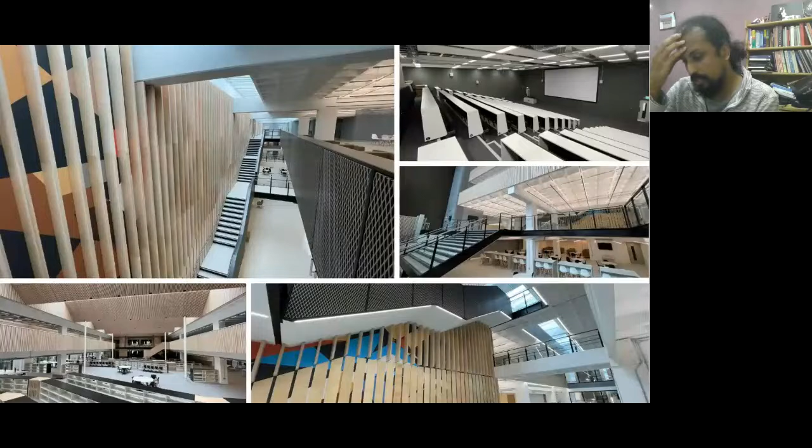We have had actually a lot of investment in our infrastructure and our campus in the last few years. I've been here for about 6 years now, and since I've started, there's been a lot of change. It's a pretty exciting time actually to be at South Bank.

The Southwark campus, which is in Southwark and on the South Bank, has had a number of new buildings. The most recent is the refurbishment of the hub, which is this building here you can see in these pictures. This was opened this academic year. It's a brilliant space, and has also recently been nominated for an architectural award for green refurbishment.

So it's been rebuilt from the old 1960s structure using sustainable techniques and sustainable materials. And that's something that we'll talk about in a bit as well, which is very much focused in our civil engineering as well.

So in total, we have about 15,000 students from 130 countries approximately, across 7 schools. And in the built environment architecture, we have about 2,500 students. That includes undergraduate and postgraduate.

It's not just about teaching for us, it's also about research and enterprise. And we've got a rich history and performance in research. Our recent Research Excellence Framework, which is the government's national assessment every 8 years, tests all the universities in the country on the quality and impact of their research outputs. We did very well, in particular in civil engineering and built environment.

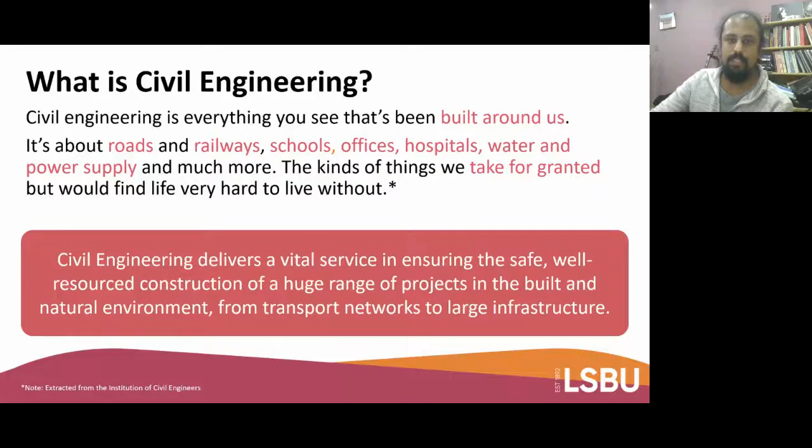Civil engineering, as the Institution of Civil Engineers would describe it, is everything that you see around us. It's the built environment. It's the roads, the rail, our buildings, our water supply, our power supply, everything that we take for granted, and we would find life very difficult if we didn't have them, if they weren't working and weren't maintained. So civil engineering really is vital.

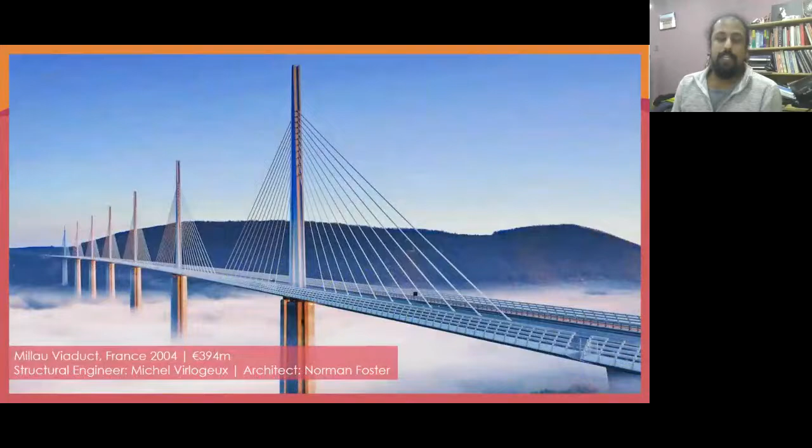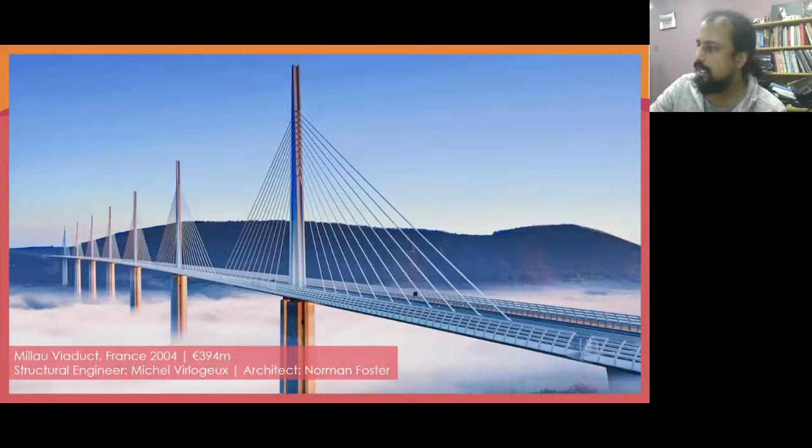I recently went to the airport in Doha, in Qatar, which is an incredible building as well.

There is also very interesting architecture in London itself, and we're very lucky to be situated in London because we can go on a lot of site visits and have relationships with London construction companies and civil engineering companies.

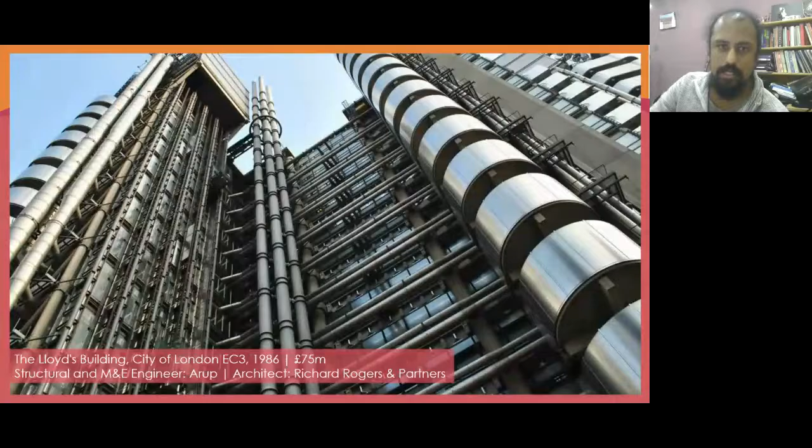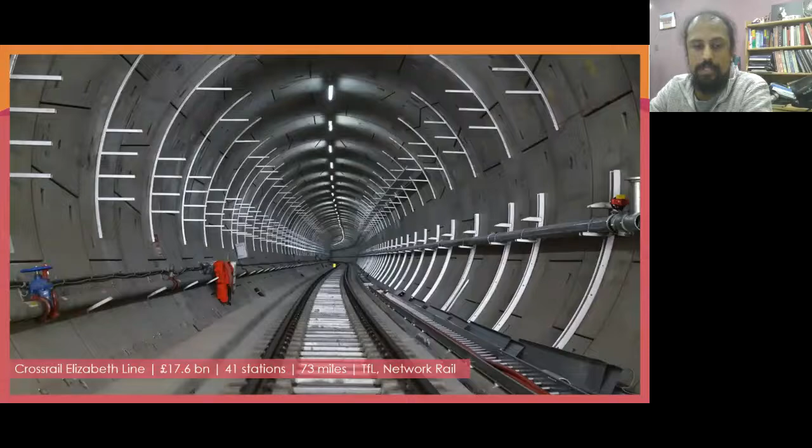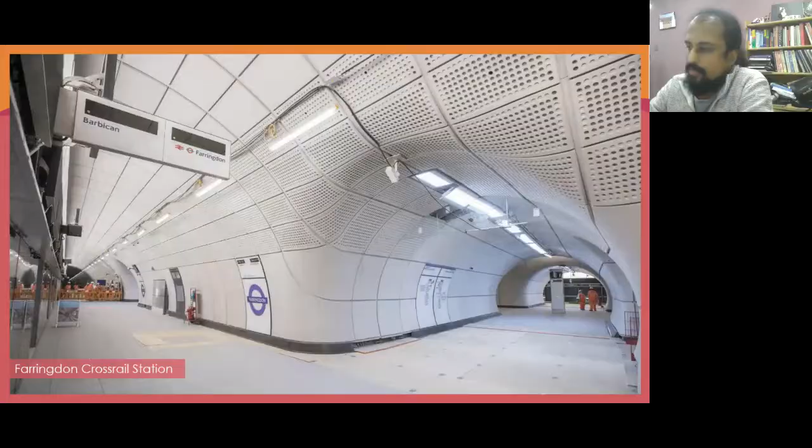So what kind of construction projects are happening now in London? These are some of the things our apprenticeship students work on, and also our full-time students will be involved with when they graduate. Crossrail has finished, so the now known as the Elizabeth line is effectively complete. It was somewhat delayed, and it was a good 4 billion over budget, so it was not a perfect delivery. There's a lot of lessons that can be learned in the procurement and execution of that. But as a civil engineering project, the actual engineering behind it is extremely impressive and exciting.

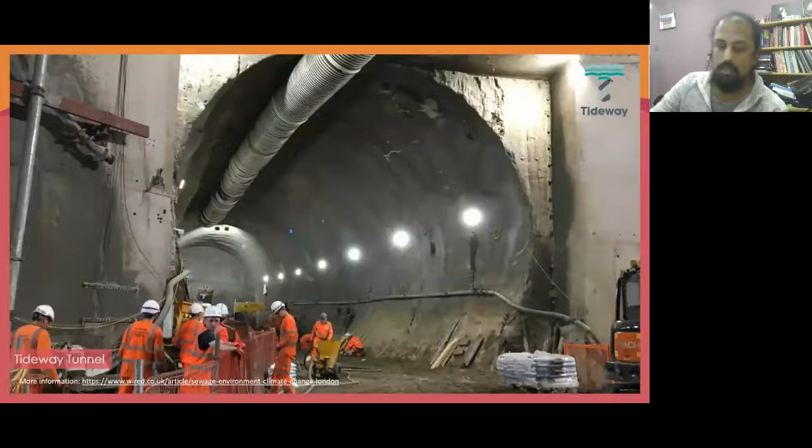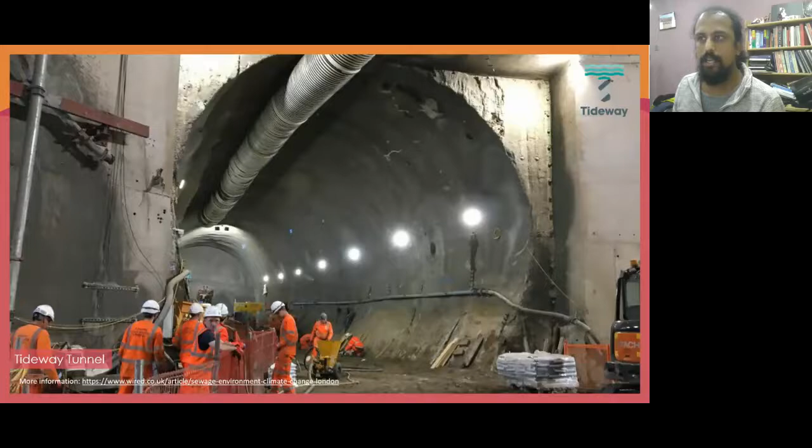We currently have the Tideway Tunnel, which is basically the new sewer system for London, which is going to hopefully solve the sewerage problem that has been a problem in London since Victorian times, because much of our sewage system is Victorian. That's a testament to the engineering skills of the Victorians, that they're still in use, but it's not really fit for purpose in the modern size of London. So the Tideway Tunnel is a very exciting and complex engineering project.

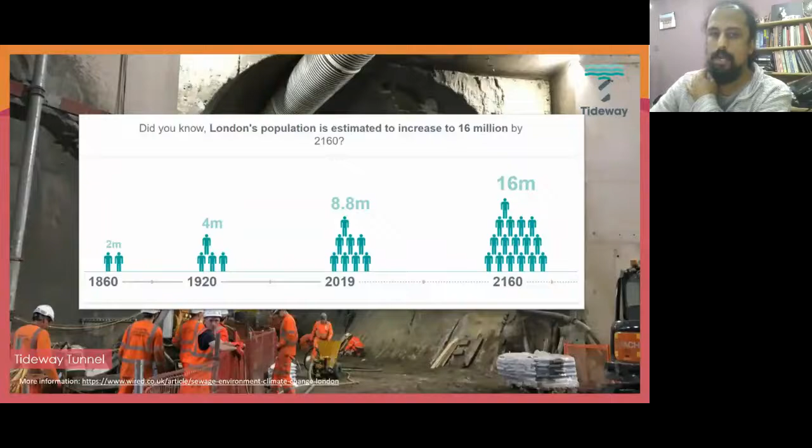Again, a bit like Crossrail, like the Elizabeth line, London is basically a honeycomb underneath the surface of tube lines and pipes and service lines, and in a lot of cases the engineers will come across tube lines and abandoned infrastructure which is not on any kind of map or schematic. So it's a very interesting and very complex thing to dig a tunnel through London.

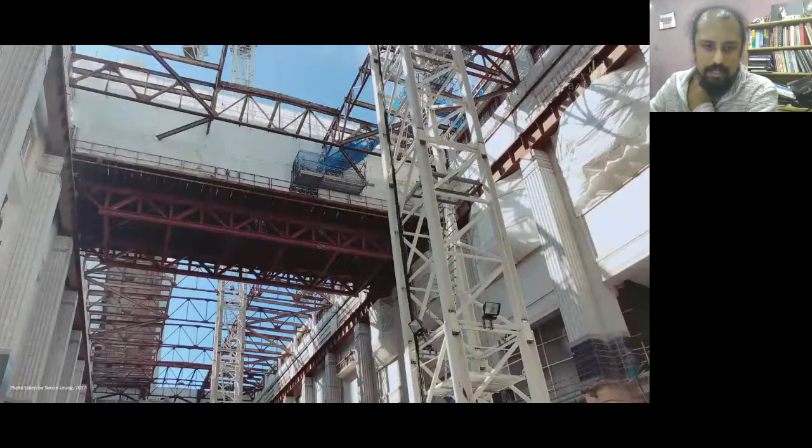Another interesting project at the moment is the development of Battersea Power Station. This is a photo taken by one of our colleagues, Simon Leung, who's an associate professor in structural engineering. That's the inside as it's been built and constructed.

One of the structures, the Keyworth building, has what used to be the largest wooden structure in the city. It's very impressive. The flagship structure at the moment is the Hub, which used to be the London Road building. As I mentioned earlier, this has been shortlisted for an award for green architecture, because the whole structure was refurbished using sustainable techniques and sustainable materials, rather than knocking it down and using lots of new concrete and new steel. And concrete is one of the biggest outputters of CO2.

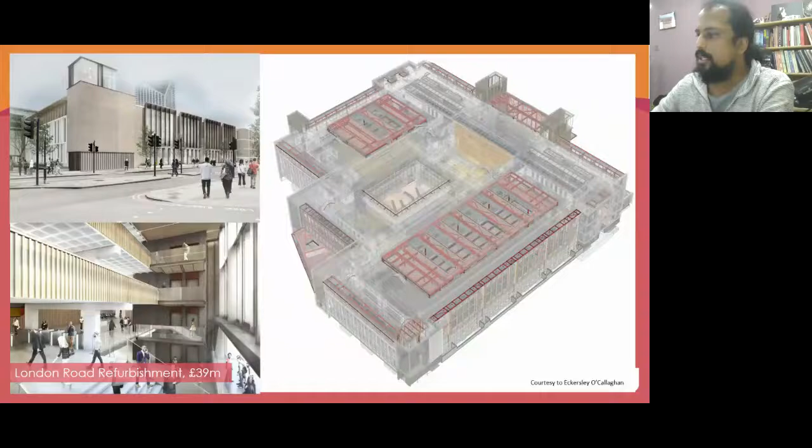As concrete sets, it gives off a lot of carbon dioxide. So modern structural design and engineering is very focused on trying to reduce the climate impact and emission impact of structures. That means using less concrete, using new types of concrete, some of which is being developed here by colleagues and academics using different types of concrete with recycled materials like recycled glass fibers and other carbon composites, as well as trying to use less steel in this building, reusing the steel. So the actual building structure is the same as it was before, but the inside of the building is completely different and completely refurbished.

And it's great because the old building was not particularly pleasant, but this one is an incredible space to work in.

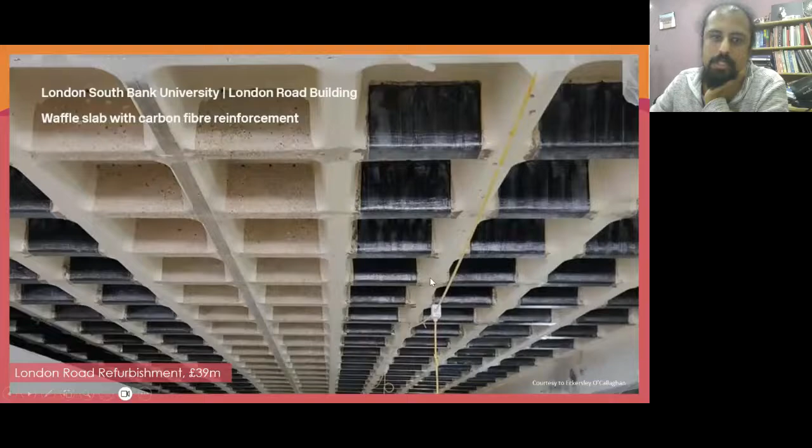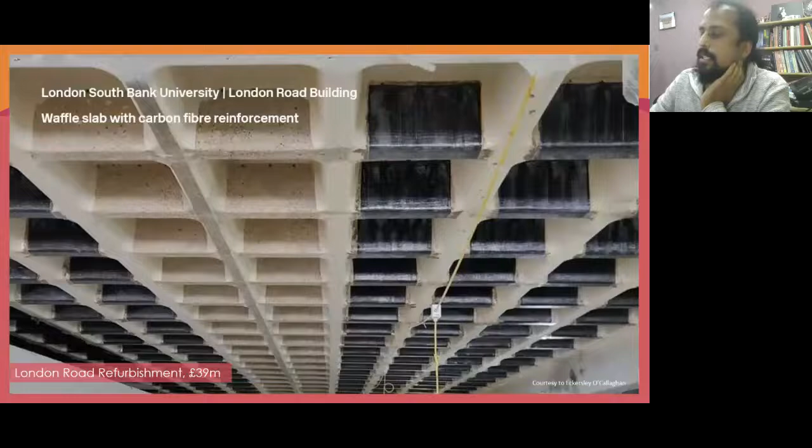One of the interesting things that's been done is the old waffle slab flooring, which is a set concrete pour put into the structure, needed to be reinforced to increase the load bearing. This was done using carbon fiber, by wrapping carbon fiber tape along the slab. So it's some very clever and novel civil engineering, and really that's what civil engineering is about: finding a problem and solving it. This has resulted in an incredible building, which has been shortlisted for an award.

So civil engineering is not just about designing structures and the built environment, it's also about protecting that environment and dealing with natural hazards. My particular area of research is coastal hazards. I'm a coastal engineer, which is a branch of civil engineering, and I particularly focus on tsunami.

Tsunami obviously isn't necessarily an urgent hazard for the UK, but this is representative of the breadth of research we do and how it applies.

Tsunamis are also similar to hazards pertinent to the UK, such as storm surges and sea level rise. Around the UK, we have significant billions of pounds worth of coastal infrastructure protected by seawalls, which will need to be retrofitted because sea levels are rising and storms are getting more severe. So there's a huge need and space for additional coastal engineering within civil engineering.

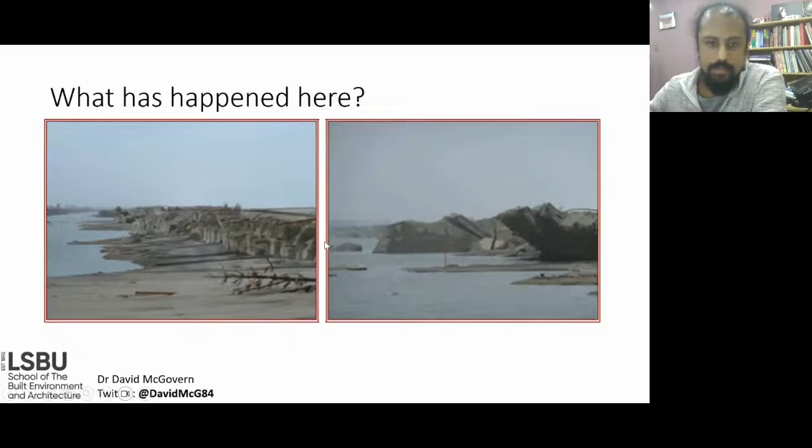This picture shows the aftermath of two defensive structures on the Japanese coast, destroyed by the 2011 tsunami. My research is based on making physical models, small-scale models of tsunamis interacting with the coastline. We do this because a tsunami is a rare and very destructive event, so it's very difficult to understand and get data on how it has damaged a structure. If we know how a tsunami has damaged a structure, we can design it to be more resilient, which is the role of the civil engineer.

But we can't do that just by looking at what happens in the real world. We need to be able to control and do experiments. We can measure the forces, draw graphs, and find equations which predict these forces. So I and my colleagues have done lots of work in large facilities where we generate small-scale tsunamis and look at the impact on structures.

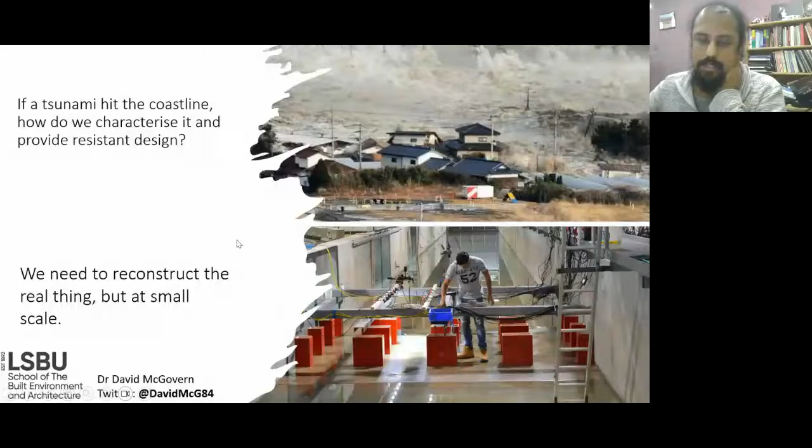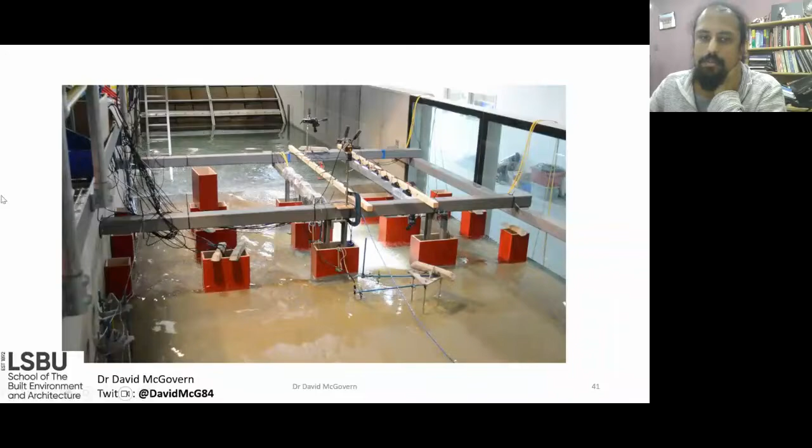This is an example of our videos, showing our experiments looking at tsunamis interacting with models of coastal structures, where we measure the forces and velocities of the flow.

This in particular is a video of a tsunami passing a model coastal structure. Here we're looking at the sediment transport that occurs, in particular a process called scour, which is the development of a large hole around the foundations of the structure because of the flooding wave. If you expose the foundations of a structure, it will lead to failure. So it's a very important aspect.

In fact, scour is one of the major causes of bridge failure worldwide and remains a very significant hazard to any hydraulic structure. That's my area of expertise.

The whole point here is that civil engineering is not just the design and construction at full scale, it's also the modeling, whether computational or laboratory physical modeling, of what your design will be and whether it will work. Because you don't want to test it out in the real thing.

You want to make sure it's going to work before you build it, because of the money, but also because if it's a structure protecting the coastline, for example, getting it wrong can cause significant losses, both economic and in human life.

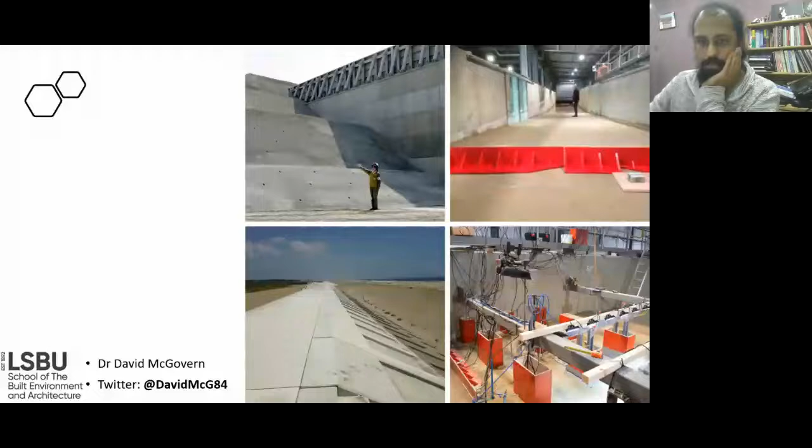So that's what civil engineering is, and there's more to it than that, of course, but that's kind of the two sides of it. So what do we offer here at South Bank if you came and chose to study with us?

Within our school, within the built environment and architecture, we've got three divisions: the division of architecture, which is the design of structures, construction, property, and surveying, which includes things like quantity surveying, which is all to do with procurement of materials and making sure projects are on time and on budget, building surveying, etc.

And then what we're focused on here today, which is civil engineering, which is also paired with building services engineering. Building services is things like water, electrics, stuff like that. So, because this is a civil engineering talk, I will talk about that.

What we do learn if you did a Bachelor of Engineering in Civil Engineering here at Southbank, we would do a number of core topics. We would give you the fundamentals in order to come out being able to come up with innovative solutions to problems within the built environment, which is what engineering is about. It's about taking a tool and knowledge and applying it to a scenario that you're not necessarily familiar with.

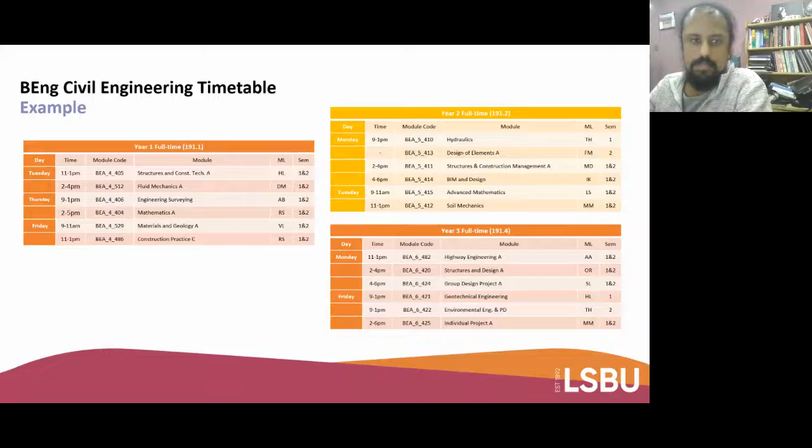And then once you've got through the first year, we would start studying more in-depth modules and more specialist topics such as hydraulics, advanced mathematics, and soil mechanics. In your final year, you do an individual project, which is a very important part of the degree. I'll come to that in a minute.

We use a lot of modern software, so you as a student would be able to use, and would be taught by people who are expert in, these different types of software. For me in particular, it's MATLAB, which is a high-level programming language, so you can use it for everything really—data analysis, big data. We teach that to give you the tools for modern engineering, which is very much data-based as well. There's lots of other software that we use and teach you to use.

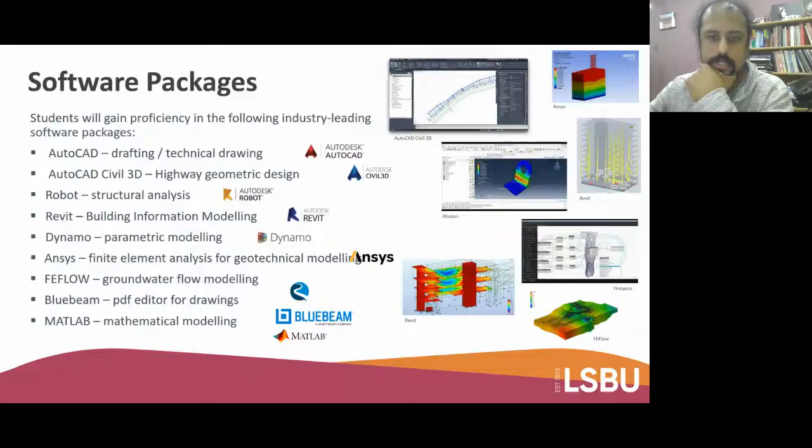So I think that's just a bit of extra information. There are entry requirements. In terms of A-levels, let's start with the courses first. We have a number of different courses within civil engineering. There's the HNC, which is a higher national certificate, and that's what we call a level 4 qualification.

Now, if you have A-levels or similar qualifications, such as at school, we call that a level 3 qualification. Your GCSE level is level 2. So you would come into university often with a level 3 qualification. A level 4, the HNC, is a part-time qualification. It's often very popular with those working in civil engineering, who will have day release to come and study an HNC. They may not have the academic background to go straight into the apprenticeship program, for example.

But you could study the HNC for 2 years and then later come back and continue to the BEng, which a lot of our students in the HNC do. So that's the level 4 qualification.

Then you have the BEng, the Bachelor of Engineering Honours degree, which is the full-time version. The requirements for that are BBC at A level, so about 112 UCAS points—all of this is on the website—or equivalent BTEC would be DDM. And that is to do the full-time civil engineering honours degree, so you would come out as a Bachelor of Engineering.

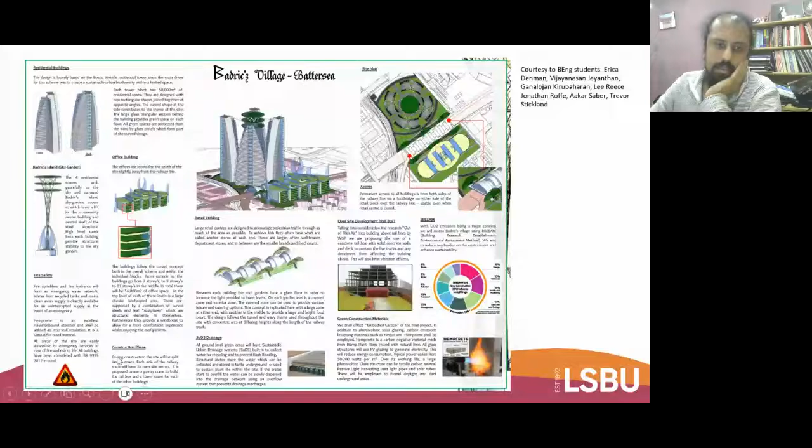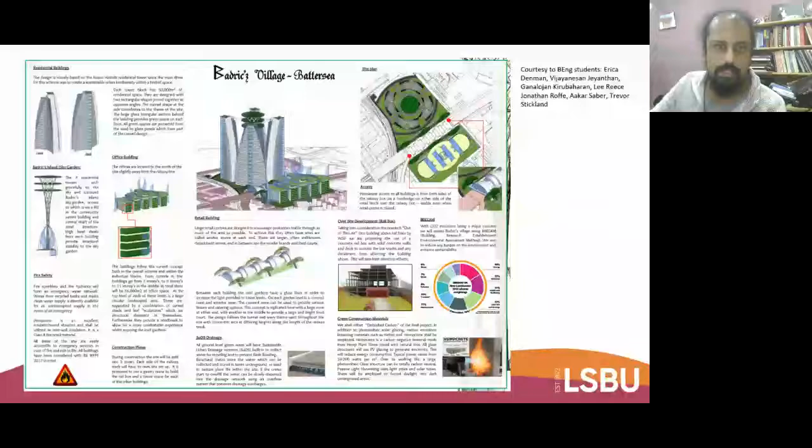It doesn't just involve the structural side of things. It involves all sorts of other aspects which need to be put into the design process and presentation, and that includes the drainage, the construction phases, safety, and the emissions and the sustainability. So all of that is very important and very much designed to be as it would be if you were doing this as a future employed engineer.

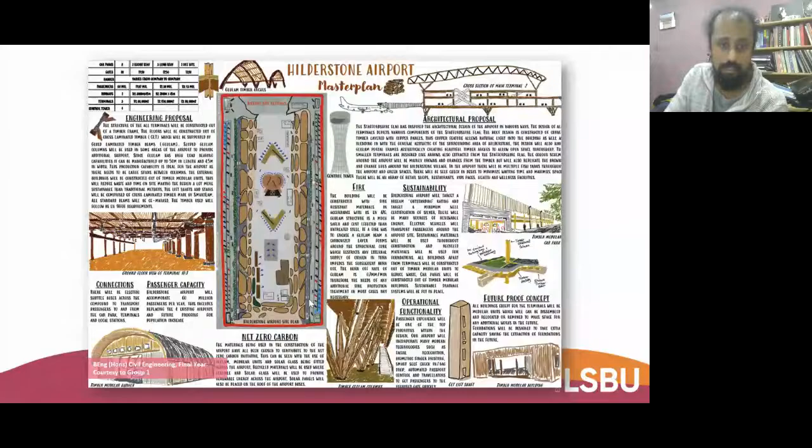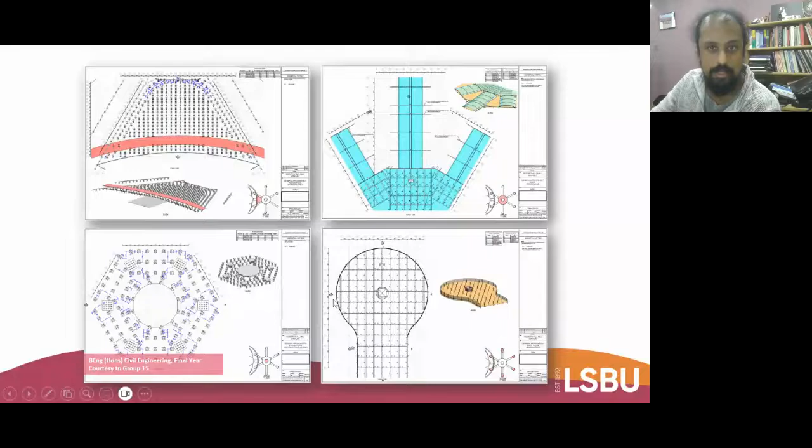There's another one here, which was an airport. Again, these are the sort of flyers for this, the posters for it, which are meant to attract the attention, as you're behaving as a consultant which has been employed, and you are bidding for a tender. So this is meant to be attractive as a tender. And then you will have to go through the actual design process in detail and in a professional format, again, under the supervision of these companies.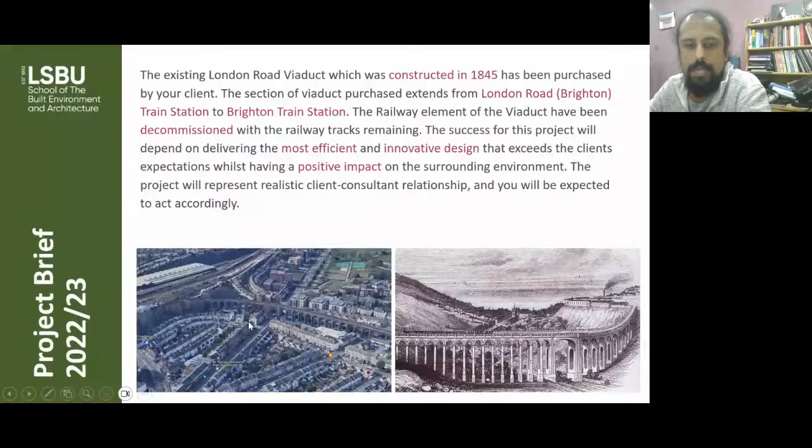Last year's academic year project was to design a retrofit for a viaduct in Brighton, where the idea was to design a new retrofitted residential commercial space underneath these arches, something that's done in London quite a lot.

And the students went through the full design process and then had to construct models of their design as well. So it's not only the structural design and the actual structural mechanics, but it's also the materials, the costing, the model. And they came up with some really great ideas. It's really quite wonderful to see.

And so constructing their designs. We also have very good relationships with industry and former students as well, and we have them come in to give us CPD courses and guest lectures all the time.

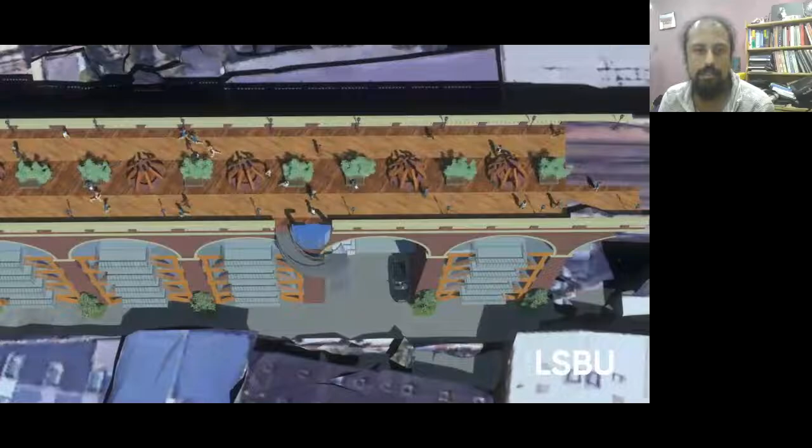This is a really nice animation which was made by one of the groups for their design for this project, which is very impressive. They've used a digital model to present how their design would look once constructed. And again, this is a really important part of being a civil engineer, being able to convince somebody that you should buy your tender, you should win that project.

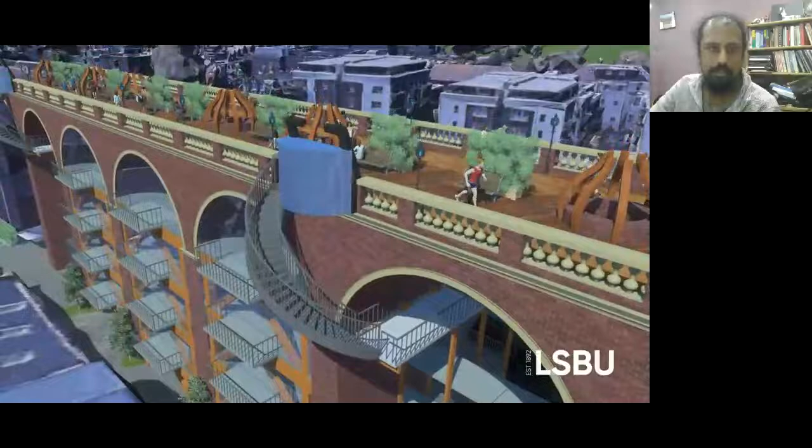And this is the quality of the work that our students come out with, which is as good as you would expect from actual consultancy work, I think. Some very happy students there.

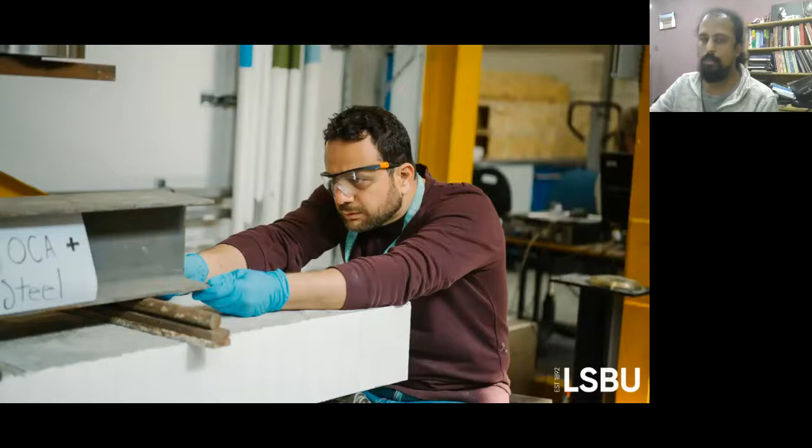So it's not just about the group design project. We have some very good facilities here. We have the structures lab, in which there is a number of structural engineering laboratory equipment. In your first year, for example, you will learn how to pour concrete with rebar, how to insert the rebar into the concrete and mix the concrete. You'll learn about the material strength of that and its pros and cons, and you'll do some stress testing on it with strain gauges and an Instron machine, which we have a very large one of.

In fact, our structural testing machine is so large that we often do some consultancy for other universities and companies on their designs and their materials. We also will teach you surveying, which is a very important part of it as well, with the latest GPS equipment, which is what you would expect to use in the real world.

We would do laboratory work, like I said before, in testing concrete and materials, testing the stress and the cracking, how different mixing of concrete, different compositions of concrete are good for different types of structure. Here, the undergraduates are testing aluminium beams for strength and compression and tension forces.

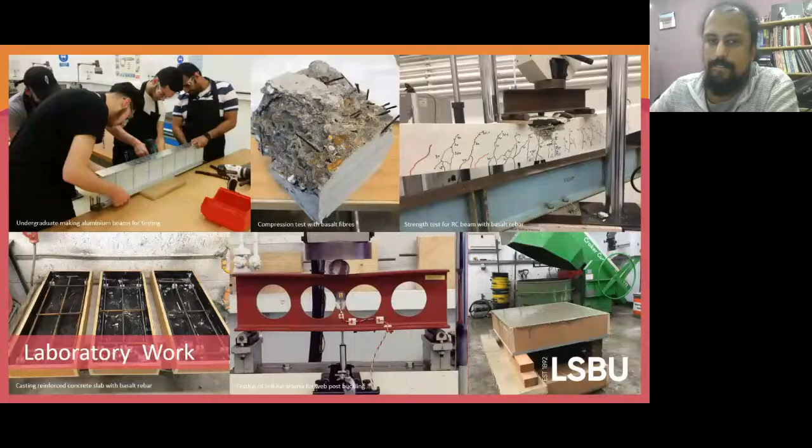We do some fire testing, particularly in the aftermath of Grenfell. We've done quite a bit of research on new types of fire-resistant cladding.

One of our favourite, certainly my favourite part of the first year is the geology field trip. This is one of the things that I am the module leader for as well. My background is as a geologist as well, so with civil engineering, everything we build with is made of rock and materials which come from the earth. So geology really underpins a lot of what we do. We build with the earth and we build on the earth. So we need to know what we're building on, how stable it is, what's its strength, and we need to know what we're building with. So it's a very important part of it.

But it's a great trip down to Weymouth in Dorset. It's a beautiful part of the world. It's known as the Jurassic Coast. It's a residential trip, the students always have a great time. And it really happens in the first year. And really, the friends that you make on that trip are often lifelong friends.

Another really nice activity that you can get involved in is the Constructionarium, where you can go away for a residential week to build a prototype structure, from scratch, from the design.

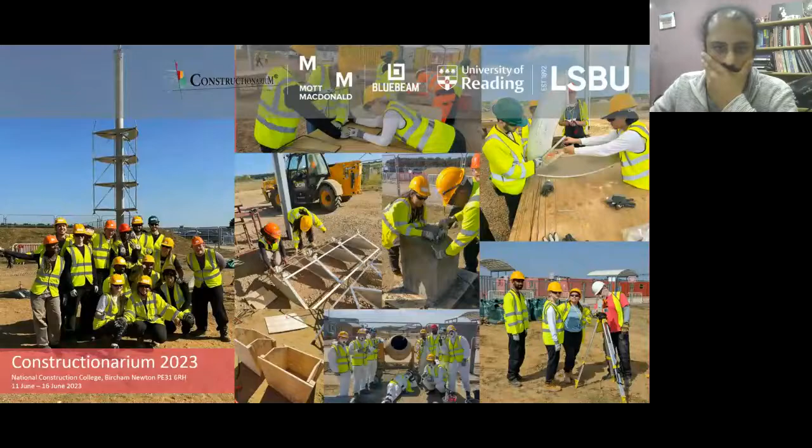Another thing that we do a lot of - we're very fortunate to be in London. There's always plenty of jobs in civil engineering, and plenty of opportunities to see sites at their various different stages: the groundwork stage, the foundation stage, or during the first fix and second fix.

These site visits are all free and voluntary. You don't have to go on them - you'll be given a choice, and you can go on as many or as few as you like, or just the ones that interest you.

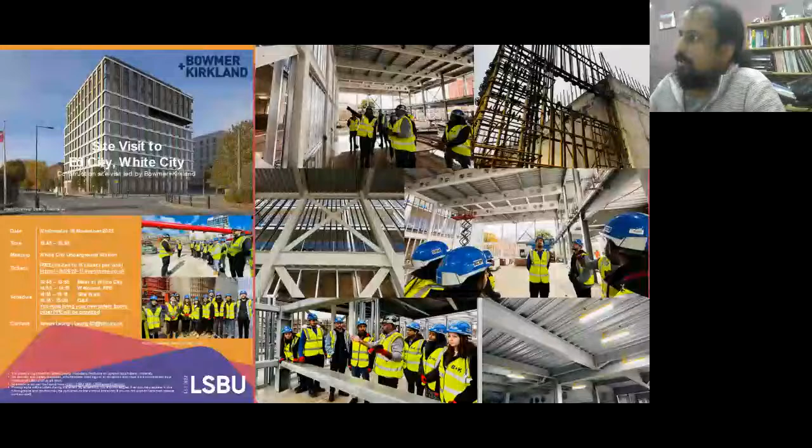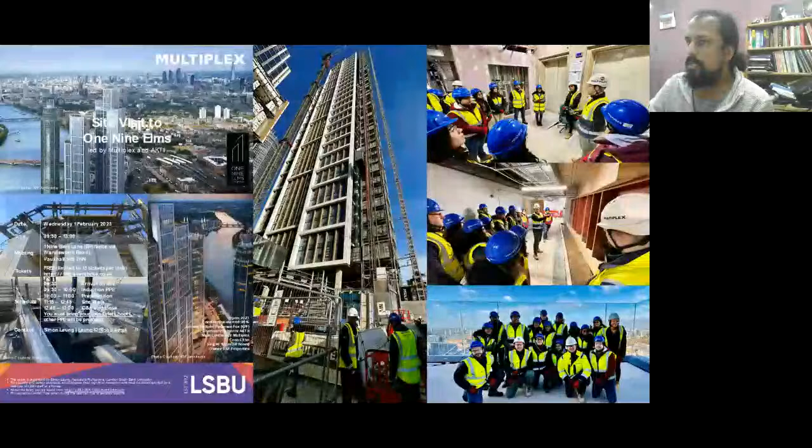Some more visits to buildings under construction in London. Again, you get a tour with one of the senior engineers on site to discuss how they're innovating, how they're designing these structures, and how they're meeting their targets. It's a really brilliant opportunity - so there's a few more here as well.

You often see these in groundworks in London and in cities - they're there to keep the walls from collapsing in. When you dig a big hole, the weight of the built environment around you is suddenly unsupported, so there's a tendency for it all to collapse inward. You need sheet piling to stop that happening, and then you need cross braces to provide resistance to that as well.

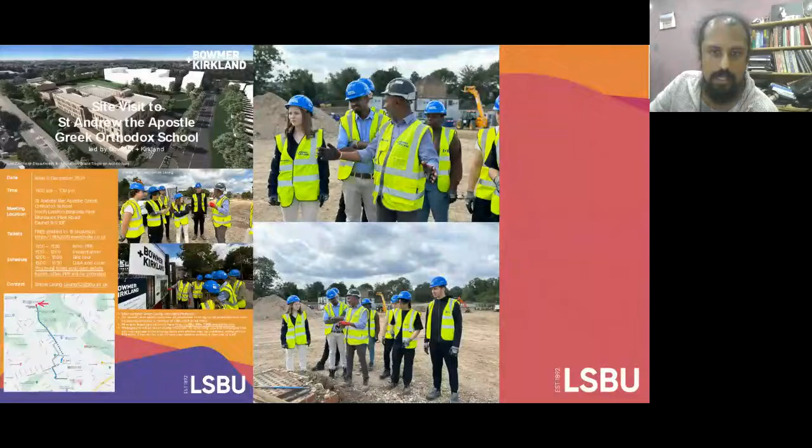You can see here there's some rebar ready for the pour of the foundation concrete. So that's some really good stuff there - some more site visits.

A quick word on the apprenticeship. We are one of the leading universities in apprenticeships in the country. Again, we're very lucky to be in London and have great relationships with London-based companies and companies in the surrounding regions. The university has about 3,000 apprentices across the schools, and we have around 700 in civil and building services engineering.

Our apprentices are amongst our best students. I really enjoy teaching them - they're very driven, very mature, and clearly really excited about civil engineering, and really happy to be doing this.

The apprenticeship is led in civils by Carlos and Simon, and similarly in building services engineering. With the apprenticeship, it's not just about learning the technical side of things - it's also about your continued professional development. This is why you come out with all the tools and the portfolio you might need to then relatively quickly graduate to become a chartered engineer.

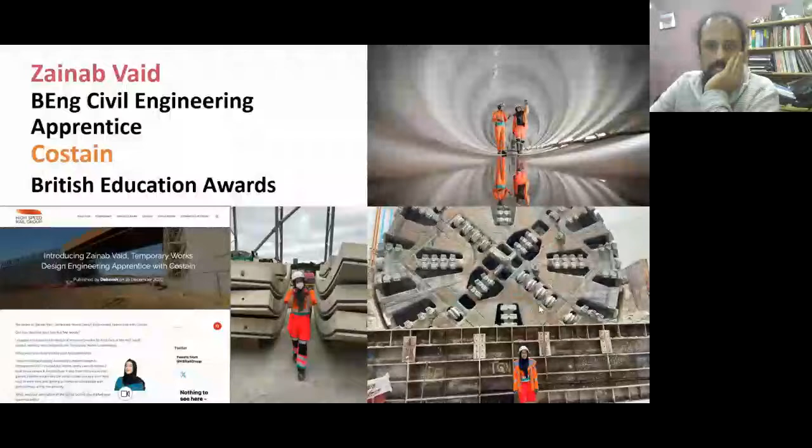It's not just those two. We also have Vicky Baith, who has won the Apprenticeship of the Year, and was a finalist for the Institute of Highways and Transportation as well. Kimaya was shortlisted for engineering and manufacturing, and Zainab has been featured quite heavily in her company doing the high-speed rail and the tunnel boring for that.

So if you're interested, this is mainly for the apprenticeship - you can apply through the website. If you're interested in the full-time degree, then you apply also through the website or through UCAS.

Right, I think I'm basically coming to the end. A quick brief on the campus - I know I've only got about 5 minutes left. As you know, we're right in the heart of South London, which is a great place to be. This is the campus itself, and it's actually quite a small campus. Of course, space in London is a premium.

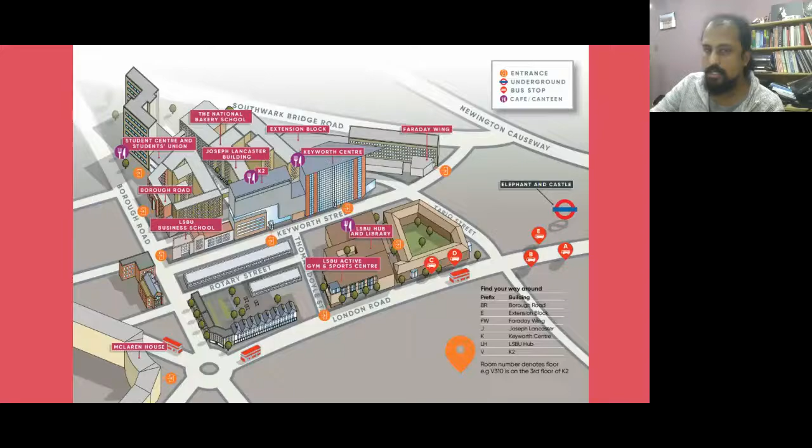We have some other campuses - we have a campus at Havering as well, but civil engineering is entirely in this campus at Southwark, very close to Elephant and Castle, Southwark Station, and Blackfriars as well. So this is the hub, that new building, which was refurbished.

So this is what it looks like again, the hub, the library, for example, which is here in use. It's a lovely building, and there's lots of space within the library in these rooms where you can book a room using the app. We have a really nice app for the university where everything - logging into lectures, everything - is done through this app on your phone. So if you want to do group work with your students or find a space in the university, you can book a room in advance using the app.

And we also have the Keyworth Centre, which I mentioned before - this wooden structure which was the largest, or tallest, wooden structure in London. I think it's been superseded recently, but you can see the wood there. I mean, it looks like it's glass here, but the actual structural members, the loaded part of the structure, is the wooden part.

We're at the Student Centre as well, which is in Borough Road, which is also a very nice space. And then finally, the most boring part - who we are.

Well, we're not that boring, but we're the ones who make you do the work. So we have quite a lot of staff - well, I say we have a lot compared to some other universities, but we're quite small in that aspect, and the advantage is that you'll be able to access us as academics much easier than you might at a university with several thousand students. Let's say Manchester, where they have 100 lecturers and maybe over 1,000 first year students in civil engineering. Here we have about 15 in civil engineering, and we have about 80 students. So it's much easier and a much more personal, community feel to this university.